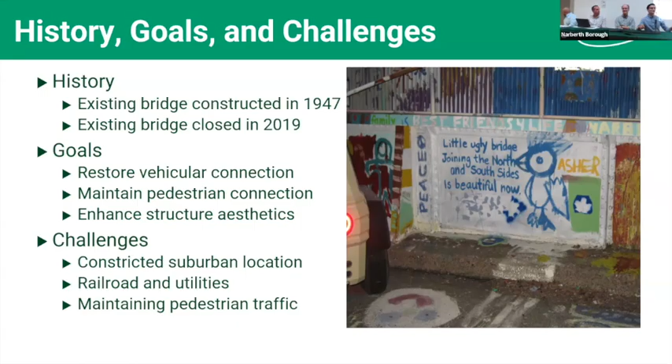That photo is from 2012 when the bridge was temporarily closed and some students decorated it. We thought turning the little ugly bridge into a beautiful bridge was a good message for today.

There are utility relocations—I mentioned our big 4 players. They have utilities on either side of the bridge that need to be relocated, primarily to get the aerial utilities that currently pass over the bridge out of the way, and 3 of them will be on the proposed bridge. There is the bridge replacement itself—we'll show some more photos of that in a second. Then roadway work along Narberth Avenue and Elmwood Avenue, along with sidewalk work to tie into the proposed bridge. The proposed bridge is actually being raised a little bit over its current position to provide more clearance for Amtrak underneath. And last but not least, architectural work, which I'll leave to Dan.

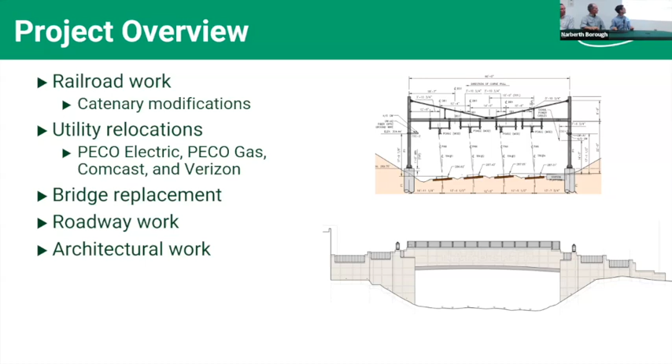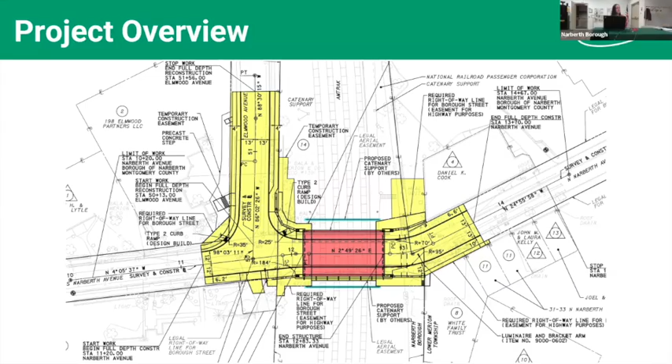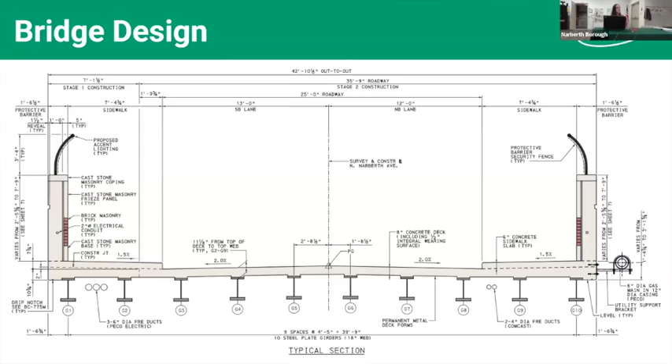We'll show you the section through the bridge. You can see there are 2 lanes, similar to the existing bridge, nice wide sidewalks on each side, and several other elements that I'm going to hand off to Dan now to talk about.

Thank you, Jesse. This is a plan of the bridge, and there are several challenges in the design, not the least of which is that the approaches are not aligned with the bridge, and the bridge goes up, so there are multiple slopes and curves to deal with. That actually created the opportunity for this design plan where there's a series of piers that alternate with fence, and at each pier there's a transition that segments the wing walls you see, so they can both step down and step around the curves. The central portion is fairly symmetrical, and each wing wall is very carefully adapted to the particular conditions.

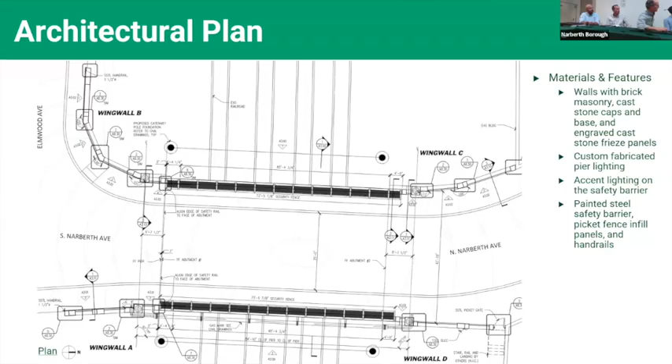This slide doesn't show it, but you all know that this bridge is kind of the gateway between the residential community on one side of the tracks and immediately into the major intersection of Haverford Avenue and Narberth Avenue, kind of the center of Narberth. So let's go to the next one, please.

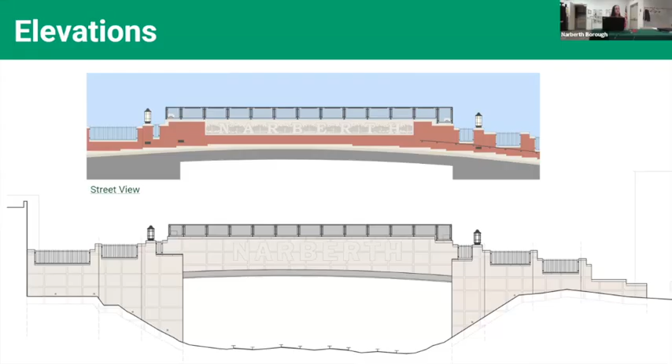We worked with members of the community and others for quite a while coming up with the design, but it is actually a series of trees that form the word Narberth, very regular. The trees refer back to elm, which was the name of the town originally, and also the quality of the canopy that exists in the borough.

And then smaller, where you can't see, but as a pedestrian you'll be able to notice there's a little frieze that starts with the original primal forest and shows the evolution of the landscape from primal forest to home of indigenous Lenape, to the farms, and then to the town itself.

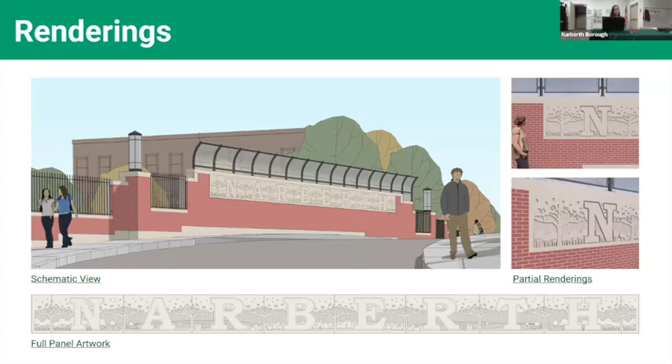That would hand it over to Mo to go over some construction schedule.

All right, let's see if this will work this time. That's right, we'll just keep going. All right, so we're going to talk about the construction schedule here. Next slide.

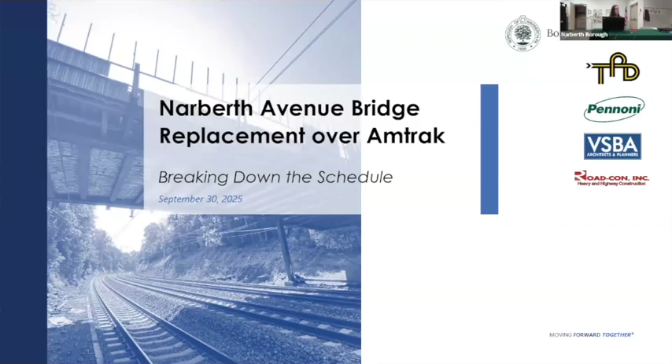First I wanted to introduce the TPD team. Again, my name is Mohammed Gowrie, everybody calls me Mo. I'm going to be the construction manager on the project. Joel Wolfinger will be the inspector in charge. He and our inspection team will be on site every day to answer any questions. If you're walking by, riding by, happy to say hi and answer any questions you have.

Next slide. And then I'm Ben Showers, project manager. I'll be on site with our on-site foreman when he is selected or determined he can get here and we can start construction on this. Sean McKenna, vice president, is here, and Derek Harper's our general superintendent. He is not here, but he sits above me and handles a lot of the logistics with our company, manpower, equipment, and getting things done.

All right, so let's go over the project by the numbers. First off, the project went out to bid, and bids were open on May 8th. Road-Con was selected as the low bidder. That's how PennDOT selects their contractors. The bid amount was $13,316,888.86.

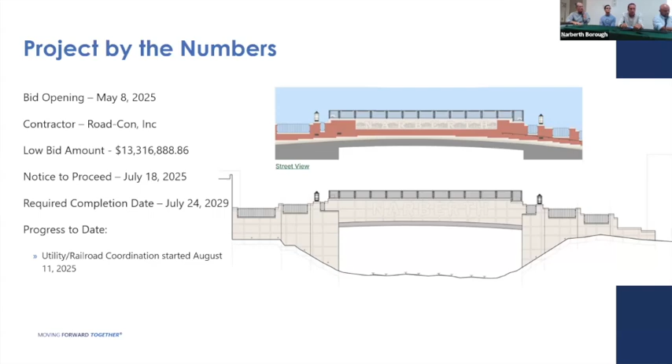By the time we went through the award process and had a pre-construction meeting, notice to proceed was given on July 18th. We have the required completion date of July 24, 2029. So far in the past couple of months, we've been coordinating with the utilities and the railroad to get the project started and underway here shortly. Next slide.

So, looking at the timeline, it seems like 4 years is a long time, but really it's going to be less than that by the time they mobilize on site next month, get the detour set up, start surveying and things like that to get this project open to the public for use. So we're going to go through the timeline here and explain exactly what the construction schedule looks like.

First off is going to be setting up the detour, which most of you are already accustomed to. Starting in a couple of weeks, Road-Con will be out installing the detour signs going up north on Narberth Avenue to Haverford, down Montgomery, to Winding Way, Bowman, and then back up Narberth to get the other side for vehicular traffic. But like we mentioned before, pedestrian access will be maintained throughout the life of the project, which was considered in the design and how the construction was staged.

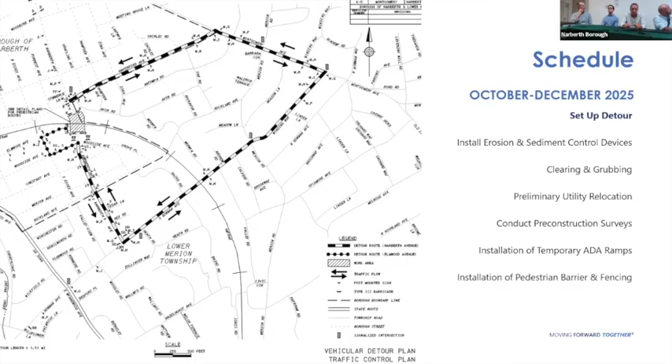So after the detour is set up, Road-Con will be mobilizing. They'll be installing some temporary fence, which is what these orange lines are. The light green lines are just the erosion control required to maintain runoff. They'll also be clearing some of the trees to allow for the utilities to remove their aerial lines off the poles and relocate them, and also doing some of the survey. The red is just the limits of disturbance, as far as we can go with our construction.

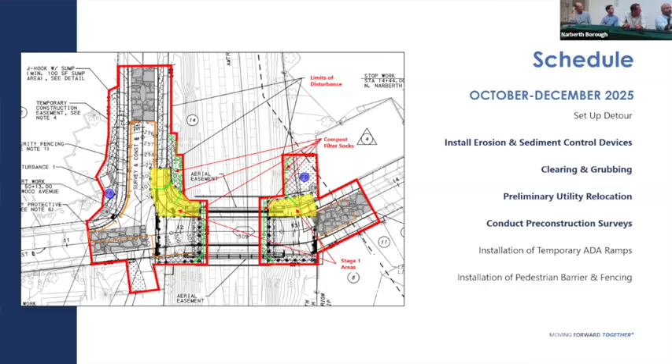They'll also be installing some temporary ADA ramps at the intersection to maintain the traffic on the bridge.

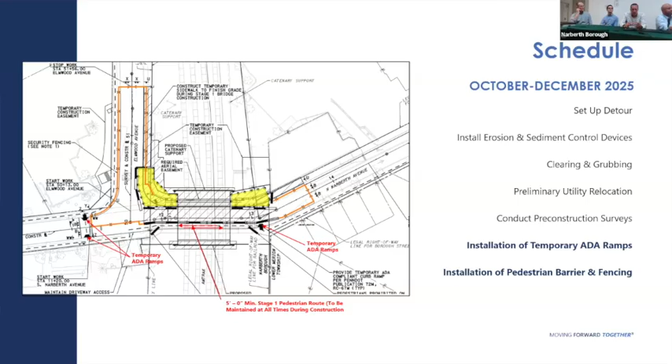This here is the first stage, shown in yellow, that they'll be constructing in 2027. This is the temporary barrier that they'll have out on the bridge, and these arrows are indicative of the access on the bridge that's going to be maintained for that first stage.

Here's just a blown up version of it. You'll see that stage 1 is this hashed area. We have the 5-foot wide minimum stage pedestrian route on the bridge, and then this area in the dark gray is going to be the first stage of construction with the 2 steel girders.

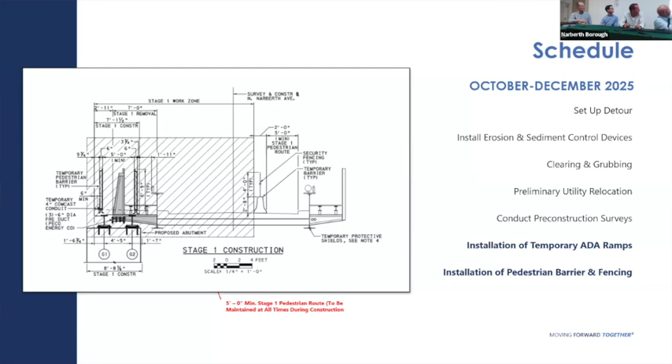A big part of the construction is coordinating with the utilities. We're coordinating with PECO Electric, Comcast, Verizon, and PECO has a main that is going to be disconnected and capped to allow for the bridge to be replaced. That's the first step in the process: getting all the utilities off of the old poles, installing the new poles, and getting everything rerouted so we maintain service to the residents and the businesses.

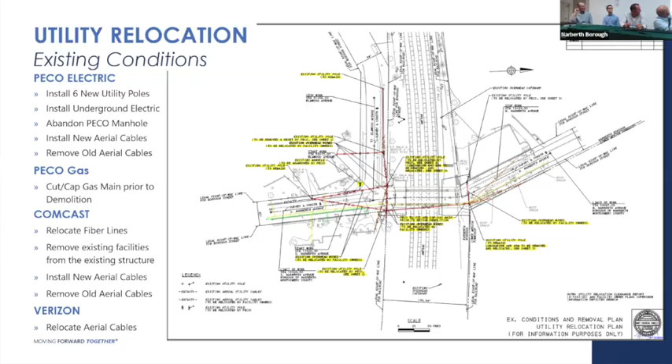The red lines here are the electric, the green is the sanitary, and the yellow is the gas line, and the orange is the communication lines for Comcast and Verizon. As you can see, they're going to be installing 6 new utility poles, some underground electric. There's going to be a PECO manhole that's being abandoned, cutting and capping the gas line, and relocating the fiber for Comcast and Verizon.

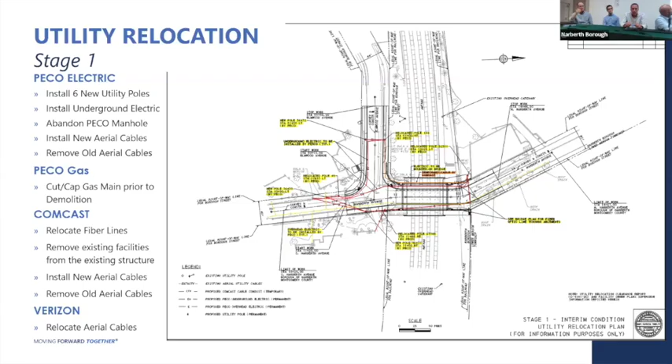That's going into the rest of this year.

Starting in 2026, we'll be wrapping up some of the utility preliminary work and getting right into the Amtrak catenary relocation. RoadCon is going to be constructing the foundation, and Amtrak will be erecting the new catenary structure on both sides of the bridge, relocating their catenary wires, and removing the existing catenary off of the old bridge. Once that's done, RoadCon will begin demolishing the existing portion of the structure for stage 1, which will be done at night for safety. Then from there, installing the temporary excavation and support, and beginning construction of the actual footings, abutments, and wing walls.

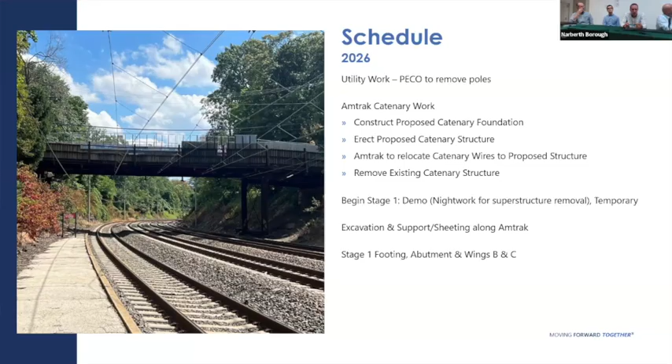In 2027, we'll continue with backfill, pouring that first stage of the bridge deck and the temporary pedestrian barrier, and backfilling the approaches. PECO will then run their new conduits underneath the new bridge in stage 1 - there's 3 conduits that they'll have. At that point, we'll be able to switch the pedestrian access from the old bridge onto the new bridge.

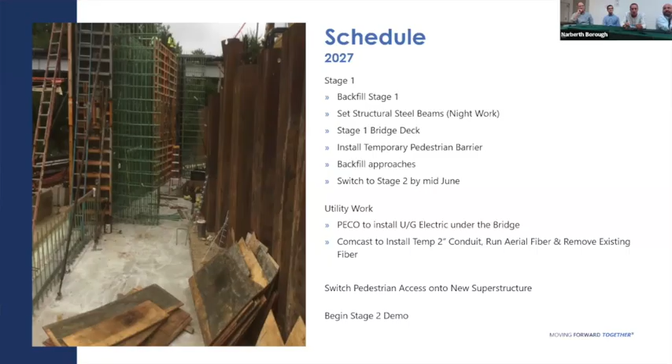So you saw before in the previous slide that we were on this side of the bridge. Now we are going to be on the left side, on the new portion of the structure. There are the 3 electric conduits going through the bridge that PECO will be relocating the cables to, and this is the remainder of the structure that RoadCon will be demolishing in stage 2.

In 2028, now we're focusing on the remaining structure. We're going to demolish the rest of the bridge, install the temporary excavation support, and then install the remaining portions of the footings, the abutments, and the wing walls, pour the bridge deck, backfill the approaches, and install the temporary ADA ramps at Elmwood and Narberth Avenue.

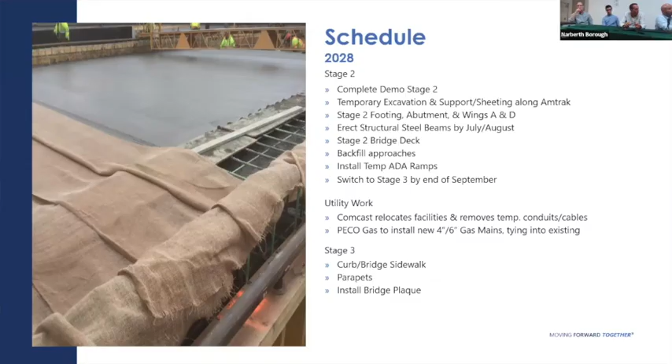Comcast has 2 4-inch conduits that will go up through the girders, so that'll be part of that work in 2028, and PECO Gas will have new gas mains attached to the outside of the bridge, tied back into the existing main on both sides. From there, we were able to go and start on Stage 3, which is going to be the new sidewalk on the bridge and the concrete barrier.

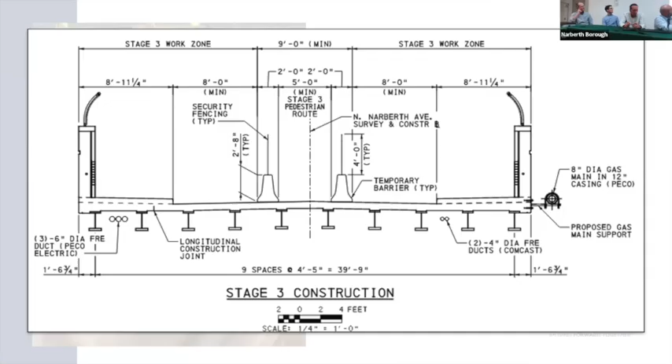Looking at the previous slide that Jesse had on the design slides, this will basically be where we're going to be at in Stage 3. The pedestrian access will then be shifted from the left side of the bridge to the center. So we'll be working on the outside faces, doing the curb and these barriers, and getting right into the architectural treatment.

At this point, we're in the final stage of the utility relocation. Now that the structure has been built, all the utilities can go into their final place, do their final aerials, and install the street lights and luminaires.

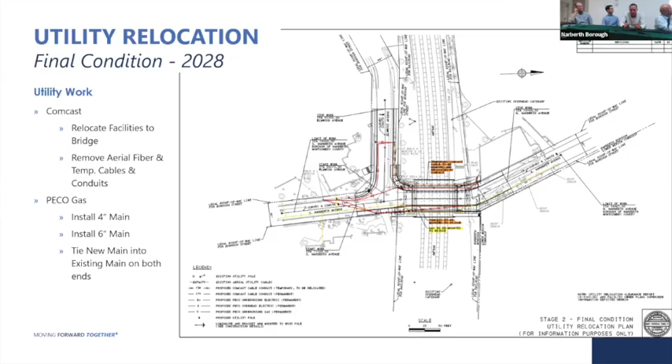And then 2029, that's where the bridge starts getting a little bit pretty, right? So all the cast stone, the pier lighting, the picket fence, the protected barrier fence, the handrail, the power supply, that's going to be the bulk of 2029. Amtrak has to come in and ground and bond to the existing structure and the utilities.

We'll be then installing the curb and sidewalk at the intersection of Narberth Avenue and Elmwood, and then begin paving the approaches, do final striping, signing, and topsoil and seed, and getting ready then to open the bridge to being fully used.

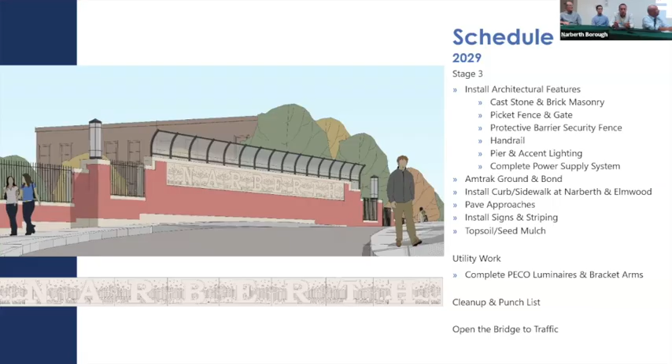So that's kind of the schedule. Again, keeping in mind that we want to maintain pedestrian access. We know that the train station is right there, and making sure that everybody's able to continue to traverse the bridge in a safe manner.

Just adding on to the equipment and stuff like that. For the businesses that are on the north side, what kind of limitation are we going to have in terms of like clients coming to our offices, accessing the businesses, stuff like that?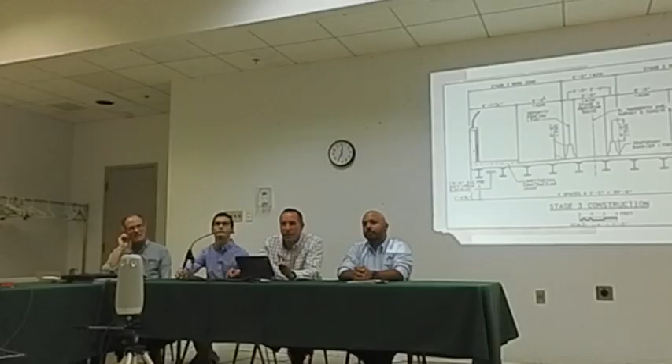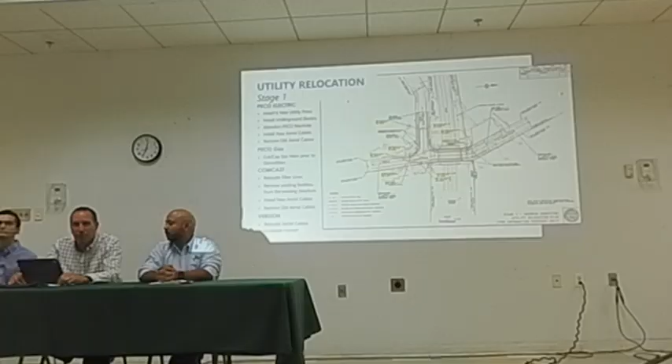You should have, the contract requires us to maintain access for those people. I don't believe there's parking anywhere on that street, or if there is, it's limited on one side. So there was a slide a few back that showed our limits of disturbance. We usually don't impact those, and we have to maintain access to the apartments on one side, the townhomes on the north side. I can't say it's going to be perfectly clear, but you'll have safe access to your front door.

Hi, good evening, my name is Anne. I recognize that this is a huge project involving a lot of constituencies, and I just want to thank you for your work. This is a great presentation.

Now I'm going to out myself, I'm the first house next to the bridge. Would you like to live in my house for the next 4 years? I don't think it's funny. I'm sorry, I don't take this... this isn't funny. Sorry, it's been a long day.

So you come over the bridge from Haverford Avenue, okay, there's the lot you mentioned where you'd ideally like to have the staging. Sure, I'm right there. Are you off the lot, or right next to the lot, okay? My house is, from my side door to the bridge, it's maybe 20, maybe 25 yards.

So, like the other person who spoke, I saw the words up there, nighttime work, and that alarmed me a bit.

So that's one concern, I have a couple of other questions. One is pollutant mitigation - like when this stuff comes down, are there special steps, environmental steps you take to mitigate the dust and things like that for medical concerns? That's one question. I know that came up when the demolition of the church happened.

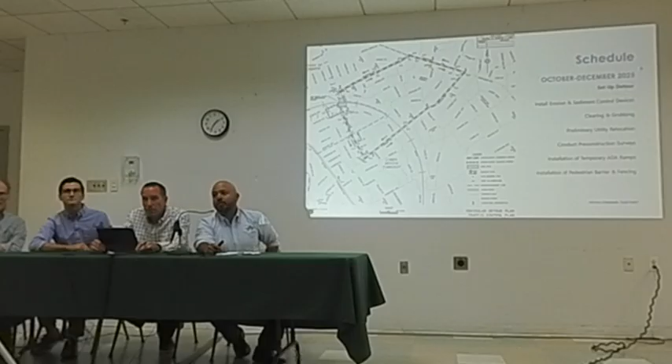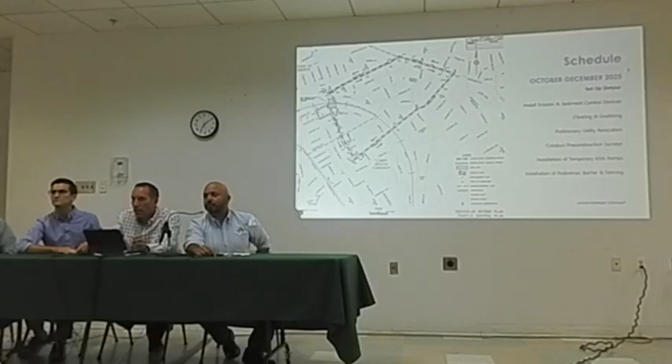Yeah, but I guess how is that different from now? It's really not, I mean, it's just officially having the signs out. This is something most people are accustomed to. And one-ways now from there to the... Right, no, not in the business area, it's one-way down toward here, but that's not proposed to change. We're not changing the direction of Haverford Avenue. They're coming up the wrong way. That's not a bridge concern, we can talk afterwards.

One of my neighbors asked about the construction noise in the middle of the night. I'm a little concerned about the train noises in the middle of the night. Have you had a discussion with Amtrak and SEPTA about blowing their horns between 12 and 4 a.m.? I'm a South Side neighbor, and it's actually an issue.

So you said that the bridge is going to be a higher elevation. How much higher than the current? I believe it only amounted to about a 6-inch increase. Well, the approaches are a little steep on both sides, and I wonder how you're going to regrade that. Are you going to make any gradual grades on both sides of the bridge to accommodate that, especially that turn onto Elmwood Avenue, which is always kind of treacherous currently?

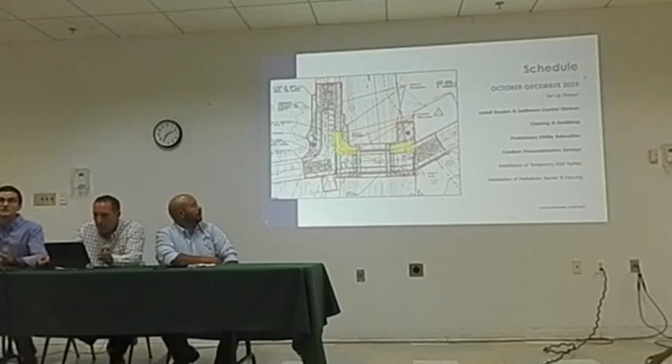Yes, can you talk about that? Yeah, it was something we had to be very cognizant of in the design. We noted the Elmwood intersection needing to potentially regrade that. We also had challenges on the north side, because there are doorways right off the sidewalk that we couldn't impact—people need to be able to open their doors. We were able to make it work. To be totally frank, we got a design exception from Amtrak to actually be substandard on the vertical clearance of this bridge. It's an improvement over what is out there currently, but it doesn't come up to their full standard.

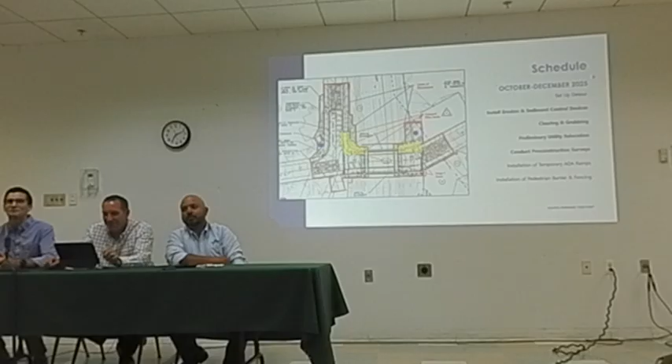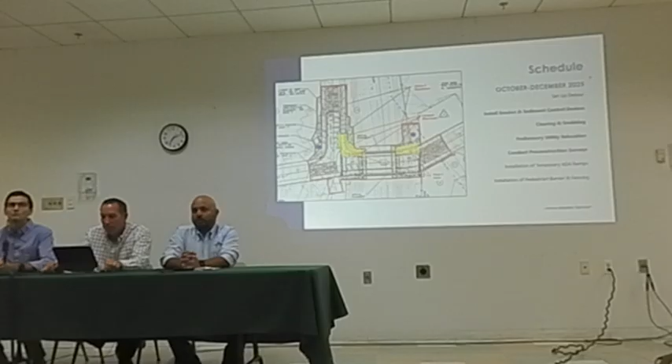Well, respectfully, I'm more concerned about me and my neighbors. Absolutely, not a problem. I guess Amtrak realizes the difficulty it poses too, and was appreciative. We brought it up as much as we thought we comfortably could to still have everything tie in while recognizing the steep grades, particularly on the south side.

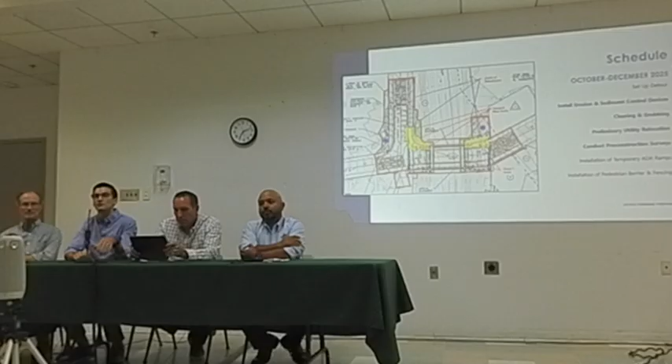So did you accomplish an easement on that Elmwood corner to allow you to make a more gradual turn? Yes, and we also, as part of the design, incorporated handrails on the south side of the bridge, so people will have a point there to view it. That whole curve has been regraded at Elmwood where it connects to the bridge.

Okay, so the 16-inch, I think you said? 6 inch. Oh, 6 inch. Sorry, my mistake. No problem. Yeah, even on the north side, the grading could become an issue—you sort of bump up onto the bridge as it is. Just saying. Thank you.

Hello, my name's Steve Levy. I've walked over that bridge every day for the last 32 years. I've been on it twice when someone has hit the steel because they were old and unable to drive, and I'm very unhappy about the fact that there's no barrier between pedestrians and traffic, particularly because it's so steep and it's curved. So that's the first thing.

The second thing is the current bridge has failed because of rust, because wintertime salt application—that is the steepest part of the borough, they throw salt everywhere, lots of it. What's your drainage plan? What's your plan on waterproofing the deck? What are you going to do with all the water? Are we going to be here again in another 50 years? I mean, 47, come on.

Seriously, I was also wondering about the plan for the actual illumination of the roadway itself. Are there going to be lights down low, or is it going to be lit up high? And my last, but I have two more questions.

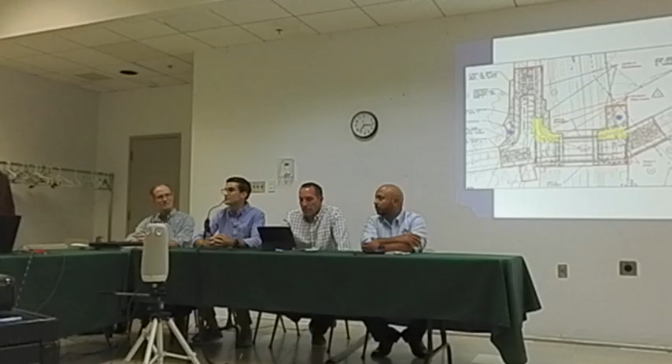I remembered my last question. How heavy of traffic are we allowed for this bridge? The allowable tonnage kept dropping over the last several decades. What's it going to go up to now? That was a result of the condition of the bridge. This bridge will not be load posted, so there will be no defined limit.

But the vehicles that drive over it have to be able to get to it, and keep in mind the low-hanging utilities through this area. So there's no dangle chain to keep anybody gigantic off of this—whoever can drive there can drive there, as heavy as they want to be. There's a permit issue too with some of that stuff. Right, their permits would require something, or may flag this as well for overhead clearances on either end.

All right, thank you, good.

Do you want to address this question? Regarding lighting, there is no designated highway lighting being incorporated into the bridge. There are existing street lights that will be restored after the fact, but the lighting that's on there is architectural lighting. It is not roadway lighting, but it lights the sidewalk—along the top, within the top rail of the metal fencing, there are LED lights concealed that will light down, wash the relief, and light the sidewalk.

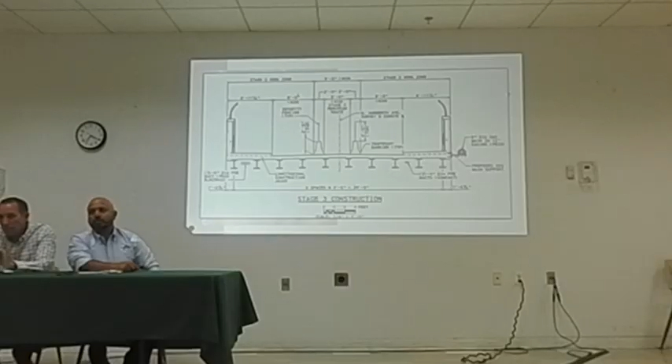Also, to the other gentleman's question, what's the typical lifespan for a bridge like this? I guess it depends on how you take care of it, but what could we expect? AASHTO standard says 100-year life is designed at now. Could you speak to that louder? Yeah, sorry, we were just conferring before we decided to tell you all.

AASHTO, which is the guiding standard, requires us to pursue a 100-year design life for our bridges now, so we'll be long gone before it's an issue.

They do require maintenance though. PennDOT's guilty of it, a lot of people are guilty of lack of maintenance. It's weathering steel, which means it rusts on purpose, that's a protective layer. The ends get painted so it doesn't drip down and ruin the architectural look. They try their best, both PennDOT and the design team, to maximize lifespan with minimal maintenance. But maintenance is important, as you see on the news, deteriorating structures across the Commonwealth.

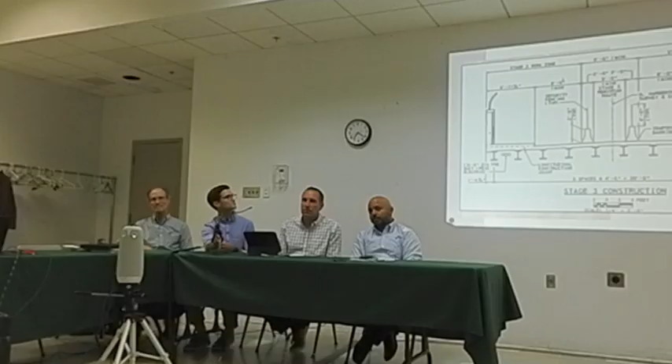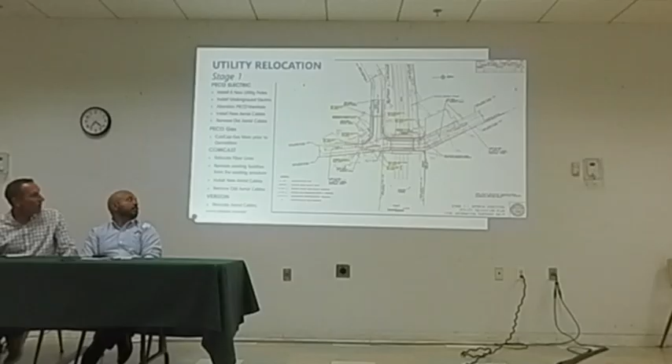One last comment, there was a picture with the orange on the inside of the bridge. One thing I wanted to point out that was a great design idea was at the ends of the Narberth sign, there's a fence so kids can still see the trains come and go, between the light and the tall wall. My kids used to love looking at the trains go by, so I'm glad you guys did that. Thanks again.

One of our constituents asked a question I don't think got answered, about environmental dust and mitigation efforts on the construction dust. Can you just address that?

Yes, we're required to do some dust control measures, whether it's moisture, water, excavations, or basic dust control. We are responsible for some of that, so let us know if you see something, since you live right there, or if there are extenuating circumstances, because we don't catch everything. We do our best to keep dust down, that's one of our safety requirements as a company too.

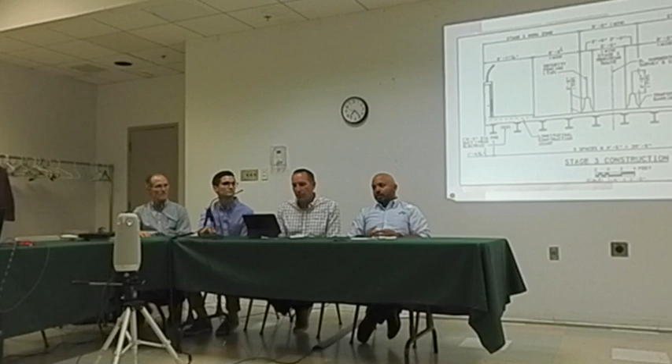I was wondering if you could speak to the pedestrian access in a bit more detail, whether it's accessible to wheelchairs, scooters, and bicycles. The pathway is 5 feet wide, which should be wide enough to let 2 wheelchairs pass. It's not ADA compliant for the width, but if you feel safe riding your bike across it, by all means, though we recommend walking your bike across since it's narrow and there may be other people coming the other direction. You're free to use it as safely as you want.

Is that 5 feet wide for the entire 4-year construction phase? 5 foot minimum, and we had chatted about the potential to make it slightly wider. I'm a little concerned because it's right next to the mainline greenway, a heavily used bicycle route. There are a lot of cargo bicycles that go past, they ride currently through it, and cargo bicycles usually require a bit more width.

I think a lot of people in the community might have that concern. Well, we can test it out, we can take a look and discuss it, see if we can grab a few more inches here or there. The average wheel gauge of a car is 6 feet, and I've seen some pretty wide cargo bikes, that wide. The concern is going to be if people are trying to go in the opposite direction, that could create a conflict.

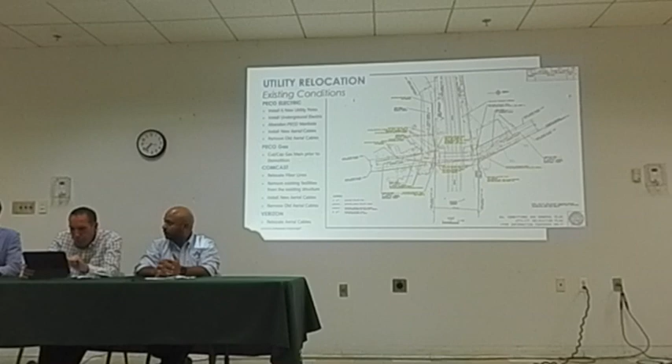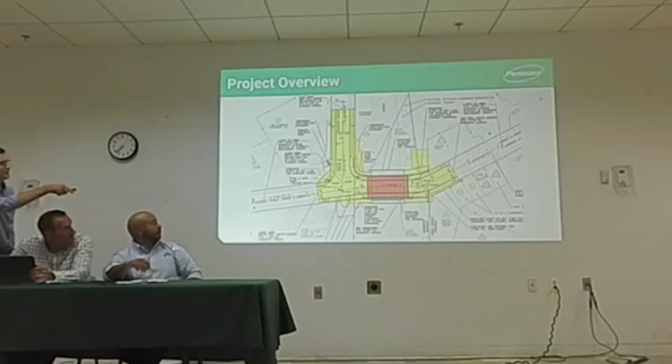Those decorative pier lights step out a little bit, might be able to see them here. Do you still have the architectural design cover? Dan mentioned in his portion there's those pier lights at the 4 corners. At those locations, it should be like third to last slide. Yeah, you can actually really see it here, let me stand at the point real fast. That's where the lights are.

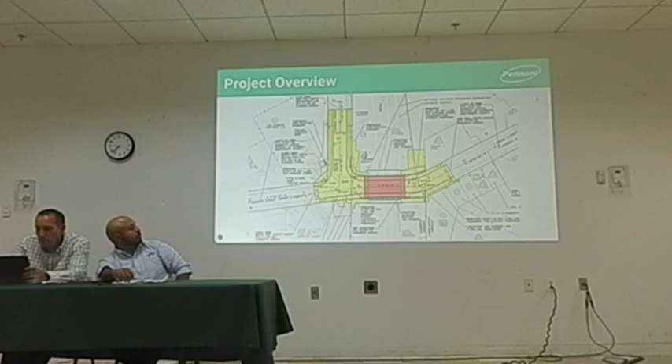Oh okay, it steps out, it does actually widen a little. I can see that. Before the bridge was closed in 2019, it actually felt like at the ends the sidewalk was narrowing more than widening, and that was a real problem. They had to have handrails there, if I remember right, so in this case it doesn't sound like there will really be a need for handrails, or will there still be handrails also? Just at the ends. There will be on the north end, I heard, right? No, it should be the south side. That was just because of the grade leading up coming to the bridge at that point, we wanted to provide a support. On the south end, okay, all right. Okay thanks, no problem.

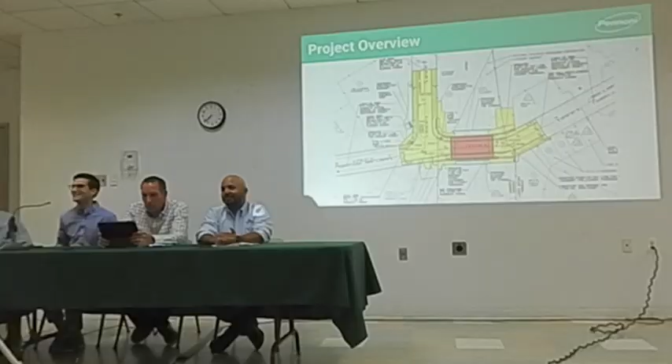Last thing, thank you for listening. I've heard you say, with all due respect, that you're going to evaluate the traffic flow after the bridge. I really think it has to be done now. When people start using the bridge, they're just gonna use it. I'm a teacher, and I believe to run a classroom well, this is the classroom right here, you have to have plans in place. I think to put stop signs or speed bumps or a light in after the fact, it's going to be harder to roll it back. I really urge you to consider that before the bridge opens up. Thank you.

Okay, anybody else in person? All right, so we'll move to online. So if anybody is online and would like to ask a question, please feel free to raise your hand and I'll ask you to unmute. Again, just going to ask, if there's anybody online who would like to make a comment or question, please raise your hand. I'm not seeing anybody raising their hand, so we'll go ahead and close up our Q&A.

Great, okay, thank you, thank you everyone, thank you.